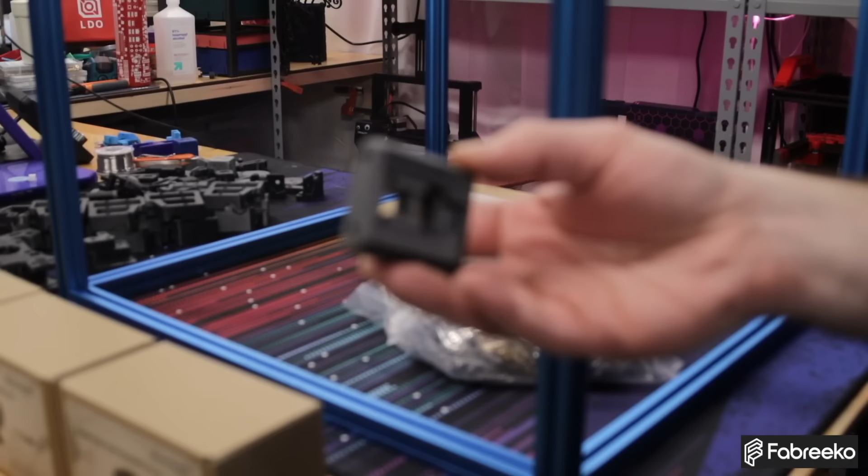It's quite nice. And this build, I've gone with a really nice, let me see if I can find the piece, a really nice set of colors. So we're doing a blue frame, and we have Polymaker. They now have Galaxy Black and Galaxy Dark Gray ABS, so these are the two colors we're using. It is a little bit unconventional, but I think it's going to look really good. So those two colors together, and that's going to be the whole entire build.

Very, very, very excited to start working on this. This is part one of however many parts it's going to take. We're going to have to build this printer as a standalone 2.4, so there's going to be some slight modifications to it. But I recommend this to you if you're building this printer: make sure you have a known working 2.4 before you start converting it. It should be extremely easy to convert this printer after the fact, and if you already have a 2.4 you'd like to convert, you might be able to do that after. So stay tuned for the series, watch me struggle through various things, and hopefully we'll have a nice working toolchanger at the end of this.

Welcome in, Maker Viking, nice to see you. Stephen Poole. Anyone else might have dipped in? What else is there to talk about?

So let me go over the projects first. That's probably a good starting point.

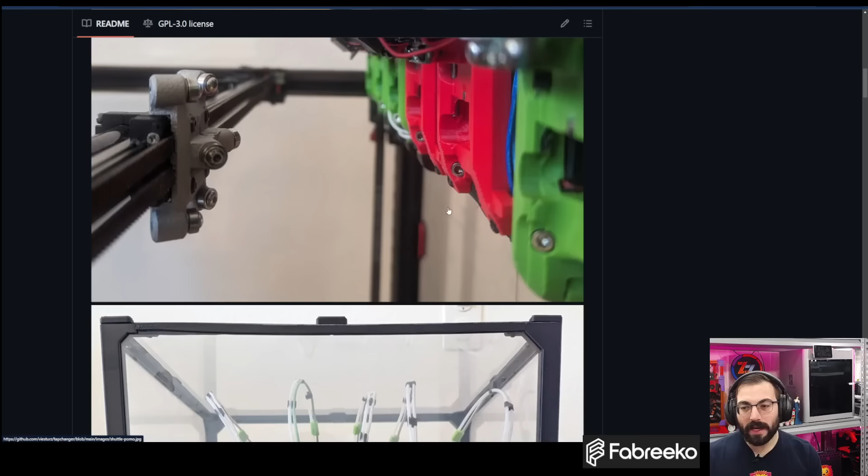So yeah, there's lots of versions of the Tapchanger. So this one right here is the Tapchanger Lite. Right now there's 3-ish versions, this is the light version. It uses bearings and rods and metal parts to ride on for the carriages. So it'll dock into one of these tools. But this right here is essentially how this system's going to work.

I'll be referencing it as Tapchanger for quite a bit of it, but do note that the actual mechanism in which the dock, whatever parts we use, that might change over time because this is still in beta and stuff might change. So this right here is a 350 2.4 with 6 dragon burner sized tool heads docked up here. So that's kind of the maximum that this will support, so this will be a 6 tool changer. It has a little, I would call this a locating probe down at the bottom, so this will align the tools. More on that later as we progress into the build.

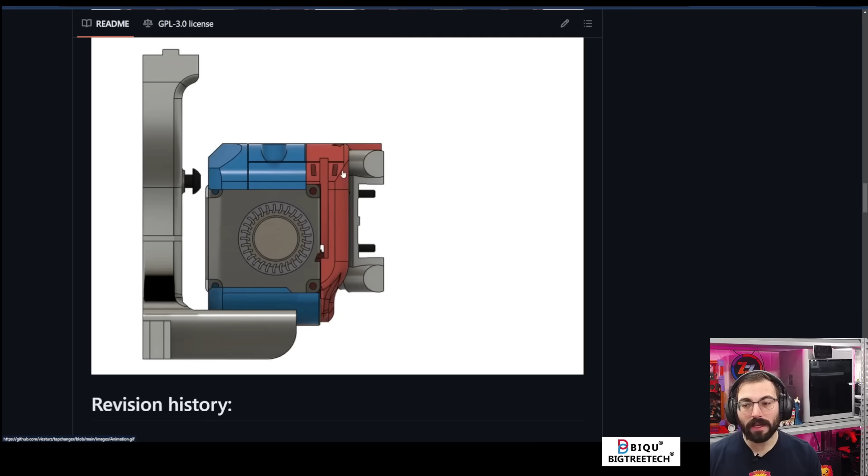You'll have your carriage, your X carriage, and that will dock into a tool and lift it up, and then it'll put it into a dock and lower. So typically on a tap type setup, it can't just pop out like that. You don't want that. So this utilizes a different design to allow the whole entire carriage to come out.

So previous versions of this included an actual linear rail version. That's what got this project going, literally taking tap and using that as a tool changer. But there are a couple of downsides with it. Even though it can be pretty rigid, people are afraid of misaligning the docking procedure, and you might lose ball bearings, etc.

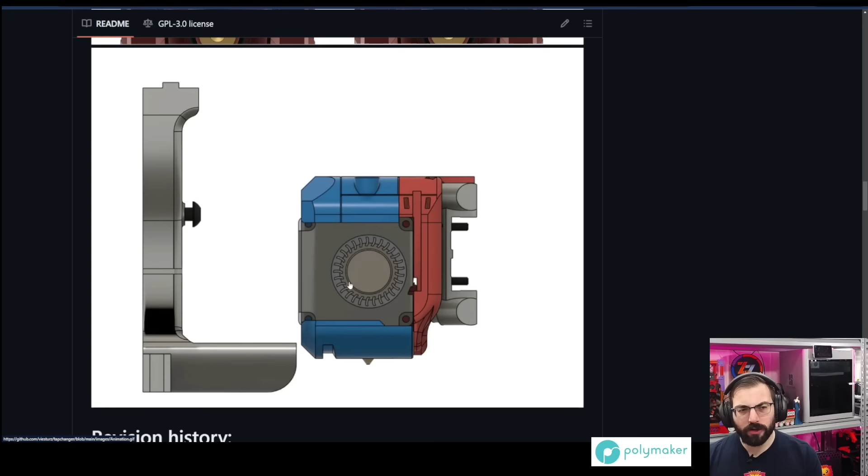So this version was invented, and this is the main version right now. But there is a new version that was just kind of released, and that is Stealthchanger. Again, this might change over time. This project seems to be evolving pretty fast, but we'll probably be using the Stealthchanger version. I have all the parts ordered for it.

So essentially, you have 2 parts right here. Okay, these are my parts. You have 2 parts right here, and I actually have them out front of me. And they will dock back and forth like that. And instead of using bearings, these use sleeves and pins or dowels. So a dowel will go into here. There's going to be 3 dowels instead of bearings or linear rail, etc.

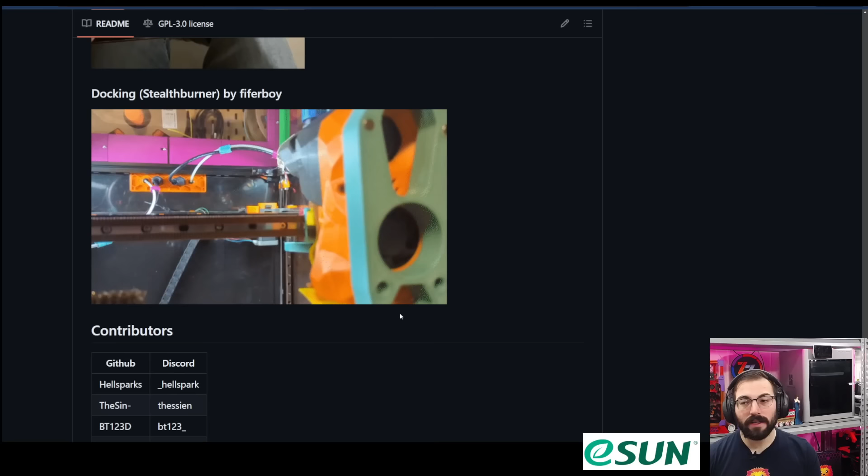And so far, this mechanism has been beta tested and allegedly successful. So here is a small video of the tool changing procedure. They're using full-size Stealth Burners, which is fine, you can do that. I would recommend a Dragon Burner for increased cooling, and it's just smaller, so you can actually fit more of them on a single printer.

So that is the current development. Note that these might change over time, and stick around for the ride.

All right, so those are the 2 different versions. We'll be building for a couple of streams, just a 2.4. So I do have a build series where I built a 2.4, the green one over there, on my channel. So if you'd like to go back and check that out, maybe get some extra context on how a 2.4 works, that will be your main source.

Otherwise, check out some of the other streamers on YouTube. Steve Builds does a lot of builds, he has a 2.4 build, Modbot as well, and of course a couple others. So there's many videos on how to build a 2.4, so don't use this as a guide to build your 2.4, but we do have a couple of special changes that we'll be making.

We are building a mostly stock LDO kit, but with a few changes. So number one, the gantry. We're going to go right to Dragon Burner because I kind of want to try out what a Dragon Burner looks like as a Stealth Burner replacement.

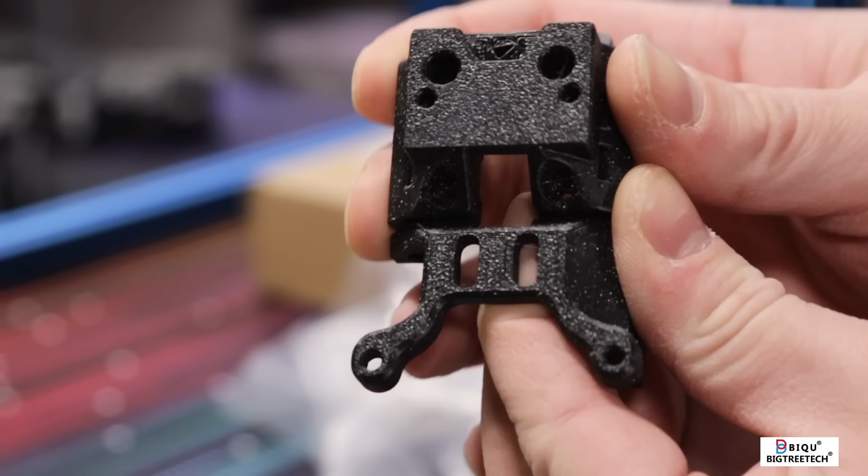And this version right here is even cooler because we're going to be using a probe. Not sure yet, we'll see what I can do. But it goes like this and like this, so we'll have the option of a probe. We can use PCB Klicky, or Beacon if we really wanted to. That's supported on here.

Anything, there's a couple of options, but for the most part it's going to be Klicky or Beacon. I'm going to see if the inductive probe fits on here. I kind of want to know, that's why I printed it to test out.

That's the dock or the mount for your Dragon Burner, and of course Dragon Burner just screws into these 4 screws. Dragon Burner 8 is the current release. So that'll be the plan, and I want to see how that works as a standalone tool head.

Be kind of cool. It's gonna look really small because this is a 350 and Dragon Burner is very small. I think I have one around here. Maybe. Yeah, down here. Dragon Burner is very, very small.

Looks like this, so it's gonna be a tiny tool head. And that goes to show, you can have 1, 2, 3, 4, 5, 6 of these lined up on the front. It's pretty narrow. But yeah, this will be cool. I'll be able to mount it. You can do this on your printer too if you want to switch over from Stealth Burner to Dragon Burner.

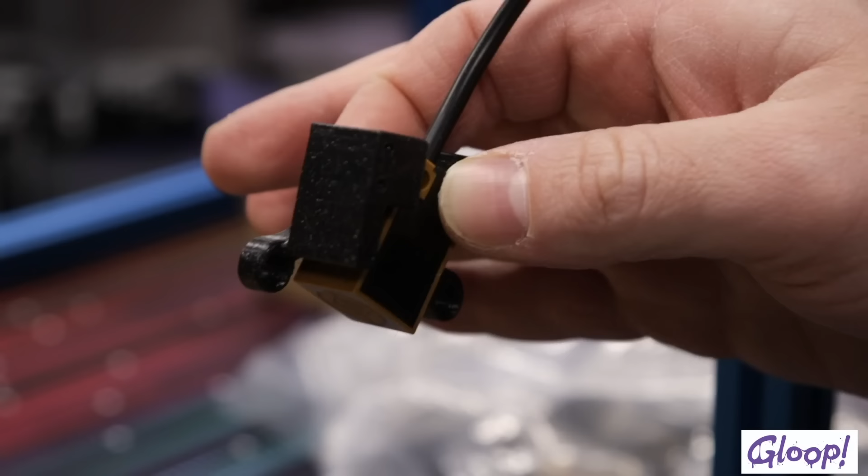I'm gonna see if this will physically mount, and it looks like it will. Yep, so we will be able to use the inductive probe per the stock build. That'll be fun, that'll mount on the bottom of this right here. This is the probe adapter for Dragon Burner. So it has the 2 screws, and I'll be able to align that perfectly wherever it needs to go.

Very similar to how you install a probe on a stealth burner. So that's cool. And I've never actually used one of those probes, so I'll finally get to experience it. And I'm not going to be enclosing it, I'm not going to be printing ABS before I test out Tapchanger, probably. So it'll be fine for us for now.

Alright, that's really enough procrastinating. So, to get going, we are going to start building a 2.4. So we're going to be following the main build guide for most of this. Now, I do have a couple of basic mods.

My front idlers, the beefy front idlers, I gave you a sneak peek of that right here. So instead of the stock Voron idlers, we'll be using these. There's almost no reason to use the stock idlers because these ones are so much easier to service, so much easier to run belts when you're initially building it. And it's going to have better adjustments, better tensioning.

So I would recommend getting these. I'm actually using a version that takes an M5 screw instead of the pin, so we'll see how that works out.

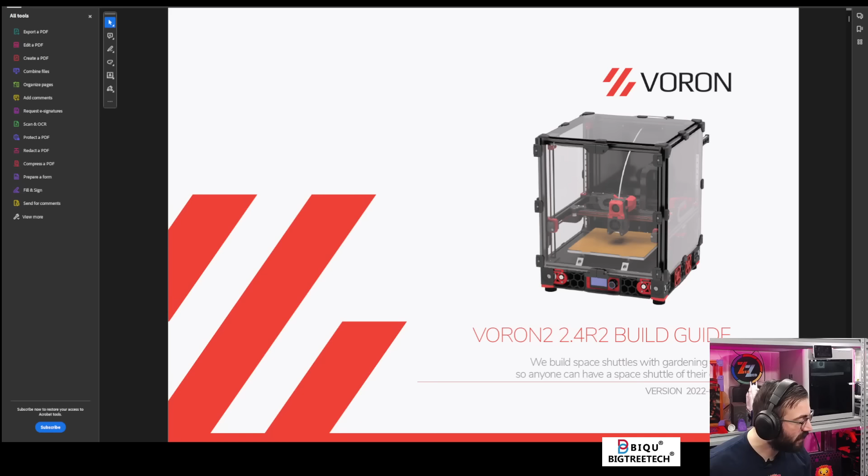We're also going to be using the beefy Z idlers because it's 4. So we have these guys right here, just little beefy Z idlers. Guess we'll figure it out. Might have all the parts for it. Not 100% sure, I think it's the same or a similar situation where it kind of just goes up and down and is, quote, beefy. Maybe, we'll see. We're not going to be doing that today.

What else? So Dragon Burner right away. Oh, electronics, I haven't decided what we're going to use for a board yet. I might go with a Manta board. I have a Manta M8P version 2, which does support CAN directly without any other modifications. So I don't need any adapters, and I've already configured a bunch of those, and it's really easy. So I might just go with that.

We're going to be using 6 CAN toolheads by the end of this. Our initial setup will actually use an EBB 36 toolhead for testing, so like a single CAN toolhead, and then we're going to go and just add 5 more toolheads. No big deal.

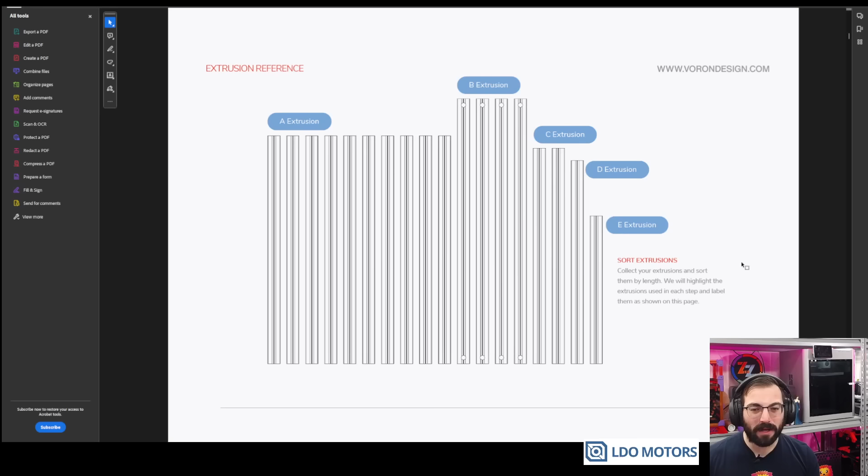All right, so to start off the build, we need to build the frame. Hey, I have already built the frame. Did that off stream because that's one of the things where you don't really get anything by watching me. So yeah, I built it and I squared it up.

So I got to this point, and now we have to install the bed rails. So let's do that. I gotta find my little corner brackets, they should be around here somewhere. I've seen them, so those.

Thinking this is gonna take a long time. It's a 2.4 build, and spoiler alert, I will be working on this off stream a little bit. All of the non-critical stuff, like the regular 2.4 assembly, I'll be doing as much as possible off stream. I wanted to wait though to start fresh and explain as I go.

So that's why I haven't started yet. And I had a couple of other projects. I just finished up a V0, you can see that behind the screen, so that's printing very fantastic right now. And then I also have a Micron Plus beta kit that I've been putting together for West 3D, and that is almost completed.

Oh wow, let's see if I'm actually gonna be able to find these. Might be in one of these bins down here.

So anyone who's watching live, what do you guys think of Toolchangers in general? Prusa is the first, as far as I'm aware, the first company to bring a Toolchanger to kind of the hobby level. E3D had a Toolchanger, but it was more of a motion system, and you had to be kind of an expert in order to configure it and determine what you're going to use. So that was a pretty cool concept, but a lot of people didn't get one because of all the work you'd have to do to set it up.

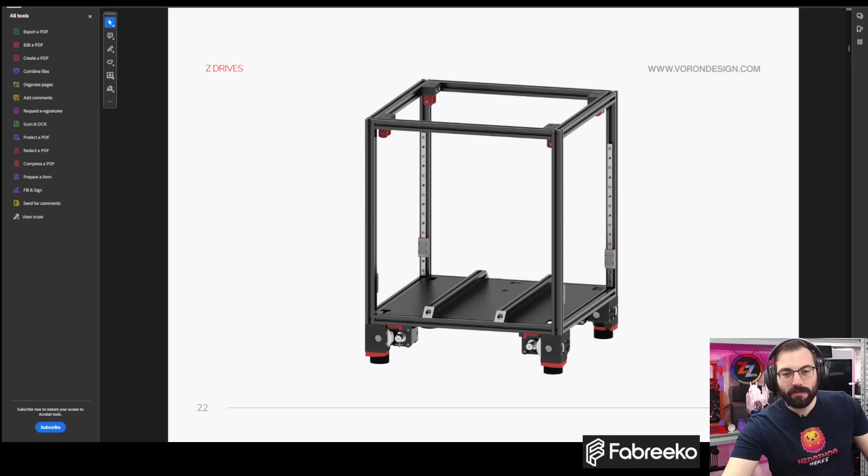Alright, well, let's skip this part and pretend that we have this bottom panel on. Let's go to here. So we're gonna be installing these right here. So this is the Z drive. If you're unaware how a 2.4 works, it is a belted Z, one on each corner. And this is a gear reduction. So you have your motor mounted here, and then there's a whole gear reduction mechanism that takes place.

So this is a listing of each drive. If you're trying to locate your drives, your front left drive is Z0, and it goes clockwise. So Z0, Z1, Z2, Z3. And then a typical build will have these Z idlers, but we have the beefy Z idlers instead of those.

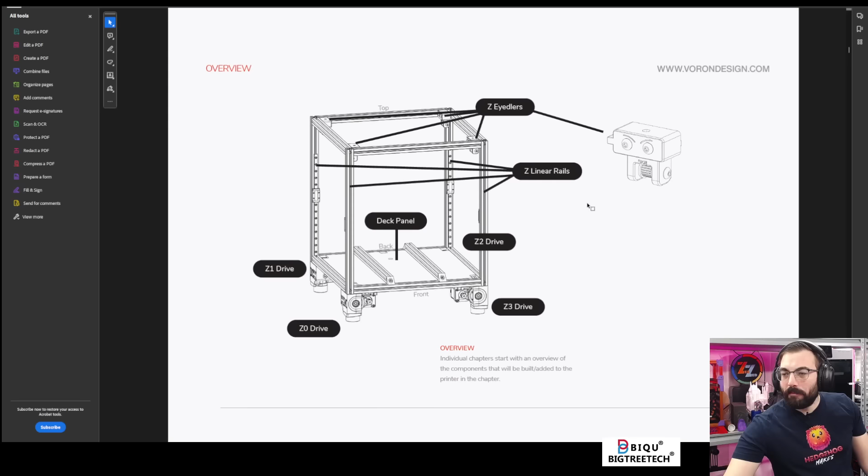Oh, linear rails, that's right. It wants us to go straight into linear rails. Do you guys want to do linear rails, or do you want to start working on the Z? Oh, did I print off the alignment tools for that? I'm actually not sure, I don't think I did. Yeah, let me print off those real quick. So yeah, that's gonna be our option, is waiting for me to print things. Good start to a build.

This first one is really just kind of an introduction to the Toolchanger, and then answering any questions you guys might have watching this live. So let me go in and preheat the 2.4. Sorry, not the 2.4. The Voron, god, Trident. Preheat the Trident, and then load up the files I need.

So let's talk about the Prusa XL for a little bit. The reason why I am very excited about this project is because, number one, if all goes well, if this is built to specification, I'll have 6 tools. The Prusa XL has 5 tools. And while that might seem like a lot...

Because I wanted an XL. I wanted that Toolchanger, but Prusa, at least at this time, is still kind of beta testing them and hasn't fully released it after over 2 years of development. So your mileage may vary.

Yeah, I'm going to totally find these parts that I need after the stream. It always happens, it always happens.

So these are the Z idlers—or not Z idlers, the Z... what do you call these? I call them belt drive assembly gear reduction thingies. It takes the motor and does a gear reduction on it, that's all, because you want the extra torque to drive the gantry up and down, plus extra precision over the stock motor. So that's one of the main benefits of the 2.4—you get extra precision on the Z-axis.

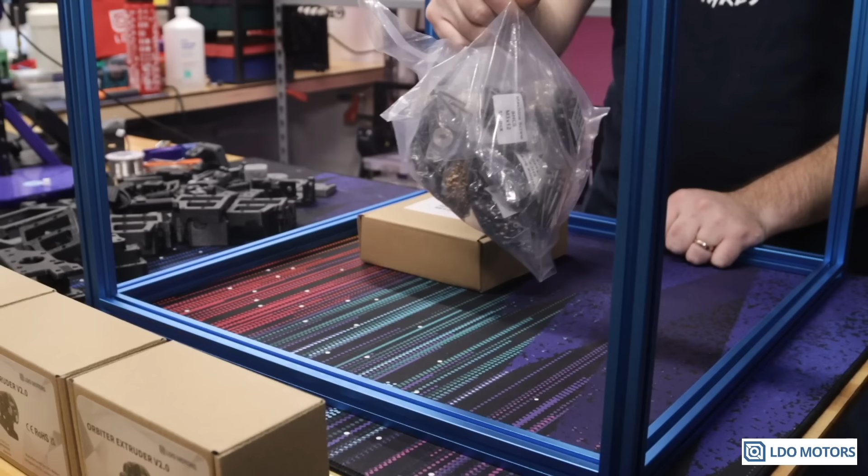So we need a lot of heat sets. Let me bust into the kit and see what we have. So this is an LDO kit, and they provide this—this is an obscene amount of parts. Like an absolutely crazy amount of parts. And this is kind of what it takes to build one of these printers.

You might think, wow, there's no way it can use all of these fasteners. And no, you actually don't use all of these. They give you a lot extra, which is really nice because if you're building something like this, the last thing you want is to run out of parts. So LDO makes sure you're not going to run out—they include extras.

So yes, one of the benefits of building a Toolchanger is that you can use support filament. One of the cheapest ways of doing supports, as mentioned in chat, is you can use PLA and PETG interchangeably as support filaments for each other.

And no, we're not giving away orbiters—I need all of these for this printer. That's why they're kind of lined up. We're actually using the stealth press to heat it up, I guess, to assemble all of these parts.

So yes, I do plan on at least trying PETG with PLA, and all the things—I'll be able to use carbon fiber nylon. I have some Polymaker support filament specifically for nylon, I'll be able to try that out and optimize all of it. I'm excited to see lots of different things you can do.

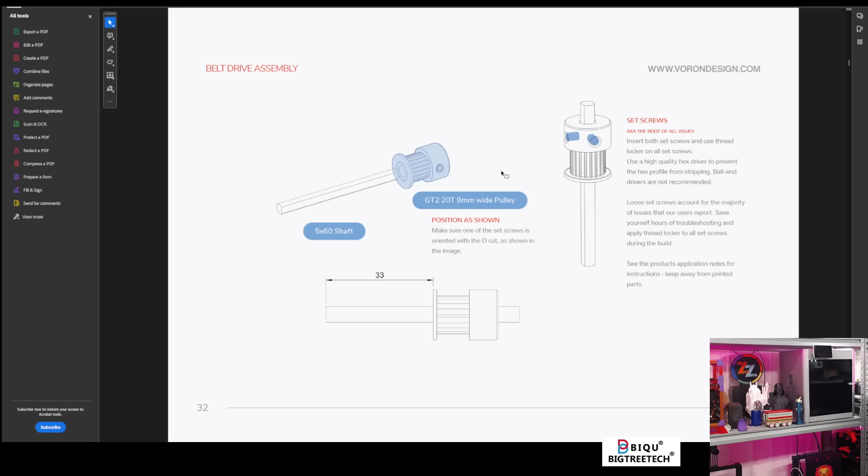So I have some foam tape, I'm going to put that back in the box. So I need pulleys, I think I need, okay, these are 20-tooth pulleys. Okay, so I have 4 20-tooth pulleys in a bag. Oh, these are also 9mm pulleys, these are wide ones. And then I need shafts, those are here as well. I'll start with that.

And then I will angle my camera so you can kind of see what I'm doing. Maybe. All right, cool.

Voron Toolchanger, yes. So TLDR, this is going to use the tap style of mechanism with a dock mounted on the frame of the 2.4, and using the 2.4's ability to move the gantry up and down, we'll be able to dock the tools at the top. This will not work on a trident style, so a fixed gantry. You need a different style of mechanism for that, unfortunately.

So these are our pins, and these are the pulleys. And I do believe we have a special treat from the LDO kit, so let me find that. Let me see.

Cool, looks like the part on the trident is done. Usually when I'm doing something like this on stream, or if I'm just building a printer, I'll keep one of my printers preheated for ABS, so I can just send a print to it.

Oh, what am I doing? Should be over in... shoot, where would it be? LDO includes a separate set with grub screws, and I gotta find those. Is it in the fastener kit? Where are those located? Does anyone remember off the top of their head where grub screws are located? I'm guessing it's in the fasteners, but I'm not 100% sure. It's kind of a small bag with little grub screws.

So this one looks kind of like that. What I do is I put the grub screw on the end of a screwdriver, and then I just kind of coat one side very lightly. It doesn't take much, and that's worked out. So do not forget that. You might run into issues long term.

So these were located in the fasteners, which it's technically a fastener. There we go. So this wants us to... first thing I'm going to do is install all of the grub screws into these pulleys. I think these take an M2, 2mm.

Yes, and make sure to get blue Loctite for these builds. There might be some other colors you can use, but I think red is definitely on the avoid list. Anything that's considered permanent is on the avoid list, because one of these days you will have to take this apart. So I'm just going to preset these grub screws just enough so they're flush, and I can kind of feel that the Loctite is giving a bit of resistance, which is good. That's exactly what you want. So I kind of just stick it on the tip of my driver and then screw it in.

So get these all done in batches. Candy. Yes, coated. These are coated grub screws. Even more delicious. Don't eat these, please.

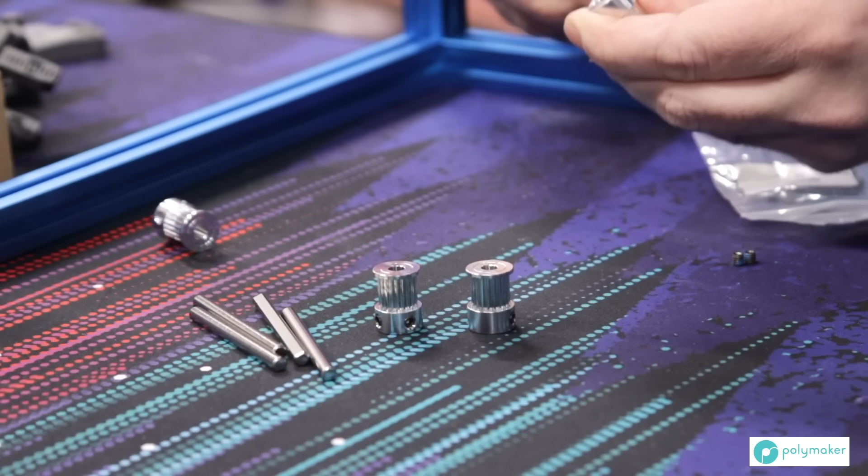All right, almost done with these. The 2.4 gets a little bit repetitive, I'll say, because you have to do everything 4 times. Starts to become a little bit repetitive. It's not too bad though. Once you get into the swing of things, your build will be done. But it's been a while since I built a 2.4. The Micron is sort of a 2.4, but it's just miniaturized, and things are slightly different. Ever so slightly different.

Alright, so put these grub screws back. We'll need them for other parts momentarily.

I actually quite like working on this desk pad. This is an LTT desk pad, but you can use really any desk pad. It's nice because fasteners won't roll away, they kind of just stay on the surface. And it's a really nice, comfortable surface to work on, so I like it.

So that's these 4. Again, we're gonna do stuff in steps. Now we need to insert this onto the shaft. So this shaft has a smooth side to it, very similar to your motor shaft too. It looks like a D. You want to make sure one of the grub screws lines up with the smooth side on the shaft perfectly, so screw it in on the smooth side first. That makes sure you have good contact and that this isn't going anywhere. I'm just going to give it a slightly snug fit just to get it on.

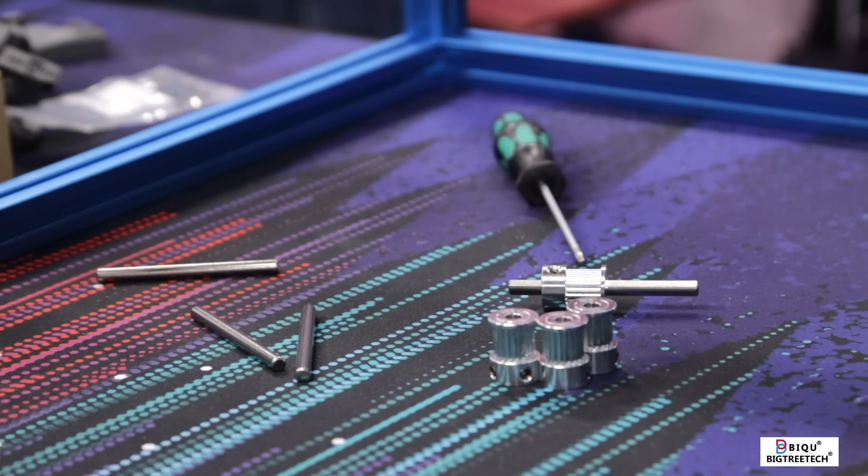And then we have to measure. I think this is an approximation, it doesn't have to be perfect, but it should be very close. So, 33 millimeters. I'm just going to use a ruler because I think more people are likely to have rulers.

So when you're building a Voron, make sure you're using your Voron design ruler. Oh, I love these things. If you ever go to a show and you can get one, Voron is sponsoring the Rocky Mountain RepRap Festival, so make sure to see if they have any. If they don't, then oh well.

So let's get this close enough. I'm just going to look at it over here. So 30, 31, 32, 33. If you have calipers, those will work better, I encourage using calipers. I don't know if one of the tools acts as a guide for this either, usually there's like a pulley guide.

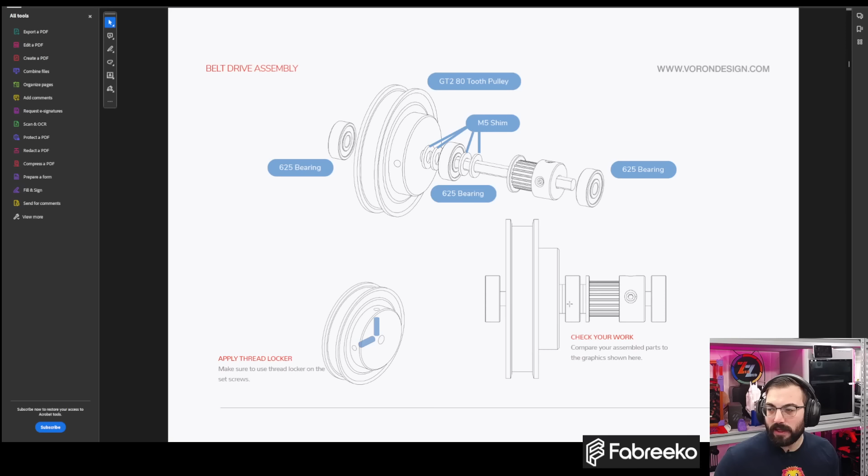Alternatively, let's check one thing out. This uses little bearings, let me see if this is correct. So looking at the diagram right here, this is our assembly. We'll have a bearing, this giant 80-tooth pulley, M5 shims, a 625 bearing, 2 more shims, then the pulley, and then another bearing. I think these 2 on the sides don't touch, but the middle one does, so you want that to be correct. As long as you're within an approximate distance for this, you should be fine.

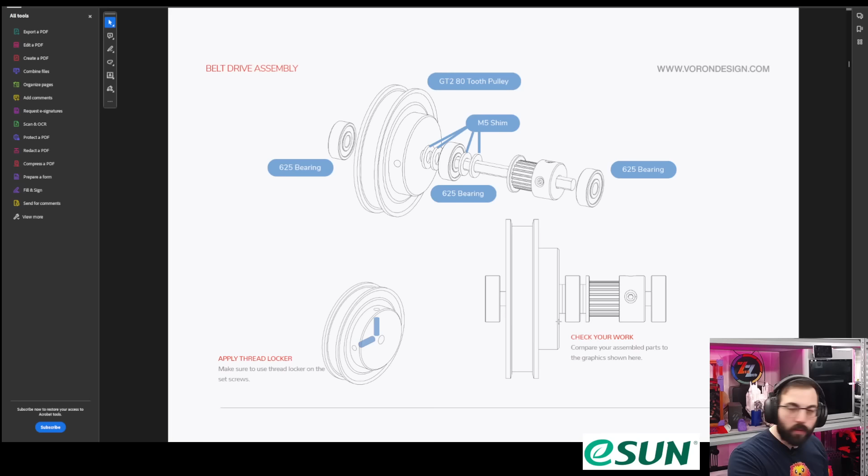So we will need to add a couple more grub screws for the 80-tooth pulley, I think. Let's double check. So the LDO kit provides these absolutely gorgeous pulleys, I love these so much. They don't come with grub screws, we'll have to install them. They should just be the same ones right here.

And these are visible when you're done the build, which is fun. I do have these in my original 2.4, and they're nice. So the grub screw will screw way, way deep in there, you'll have to really screw. So what I like to do is just watch that center, look at it until the grub screw starts poking out, and then back it off. Here you can see the grub screw starting to stick through, that's too much. Back it off until you can see straight through the hole without any obstruction, so that way we can slide this on and get them tightened up.

So do not forget these grub screws. In fact, let's just do them all because why not? Let's bring it to the front and do them.

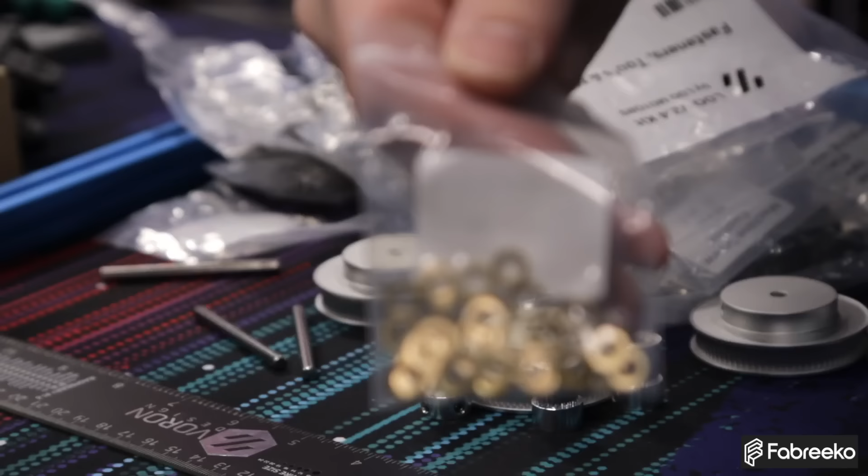Aha, here we go, so these are our precision shims. So these will be used as spacers for a lot of our different sections.

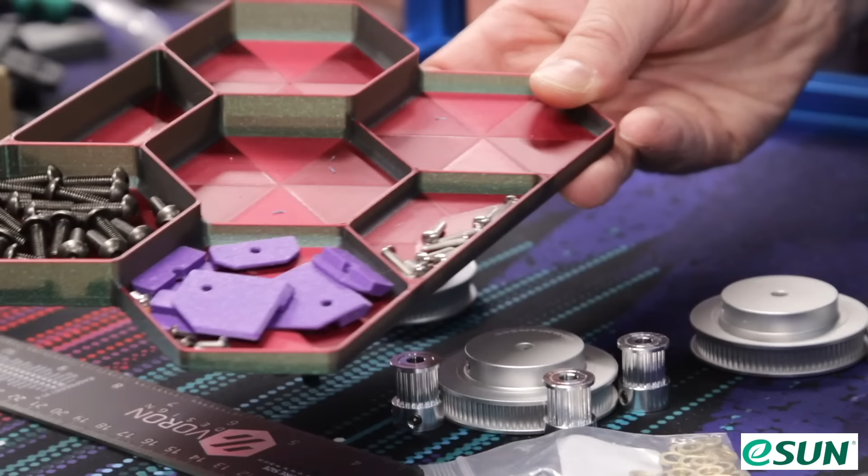It's all back. I usually do this - I'll put everything in, and as I start a build, I'll dump out a bunch of parts. I think I actually did that already. Didn't I already print off a hex tray for this? Now that I'm thinking about it, one that has Christmas colors. Oh yeah, I did, I totally did. Nice, I printed this out and started using it for other projects, but these were the fasteners that I used. So let me just put this aside, and I can start using this. I got one random section of misfit fasteners.

So these shims, I can just put them on the table and only take out as many as I need. I'm comfortable not losing them since I'm building inside the frame, so I'm not just going to dump them everywhere. Let's take a bunch out for now and put them back when I'm done. It's nice to keep them in the bag because they're organized.

So going back to this step, we have this right here, and then we have 2 shims, 1, 2. We'll have a bearing - these are the 625 bearings. Those slide on. Then I'll need 2 more shims, 1, 2. I'm looking at the guide right now on the manual, I'll show that right after the fact.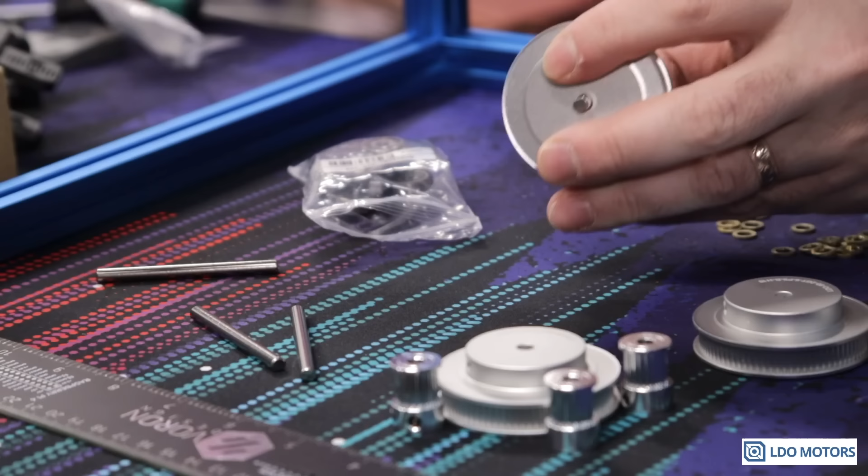And then we have our big 80 tooth pulley. Just as before, we're going to line this up with one of the grub screws. Doesn't matter how you install it, just make sure the flat shaft has a grub screw lined up with it - line it up with this one right here if you need to. This is when you take this thing and press it together, hold it snug as you screw this in. You could even hold it like this if you wanted to, but just hold it in place so that this makes contact - that's important to keep everything firm.

So before I forget, I'm going to screw in the other grub screw as well. This is a great check - I don't think I screwed this one in. Yeah, I didn't. Great check to get all 4 grub screws screwed in. You do not want these loose. You don't want them excessively tight, but you don't want them super loose. Very, very important note.

Do not use a ball end driver, which looks like this, to tighten grub screws. You have a chance of stripping them, and if you strip a grub screw, you're going to have a very bad day because you'll never be able to get it out. You have been warned.

So just by visual inspection, it looks like we have more shaft on this side than this side. So if I wanted to, I can actually move this whole assembly over to kind of center it, and I think I'm going to. I'll use this one as a reference when I build the others on where to put it. This is kind of eyeballing it, but it'll be good enough for our purposes. So I'm going to move this over a little - just have this screwed in pretty well, unless you want to slide.

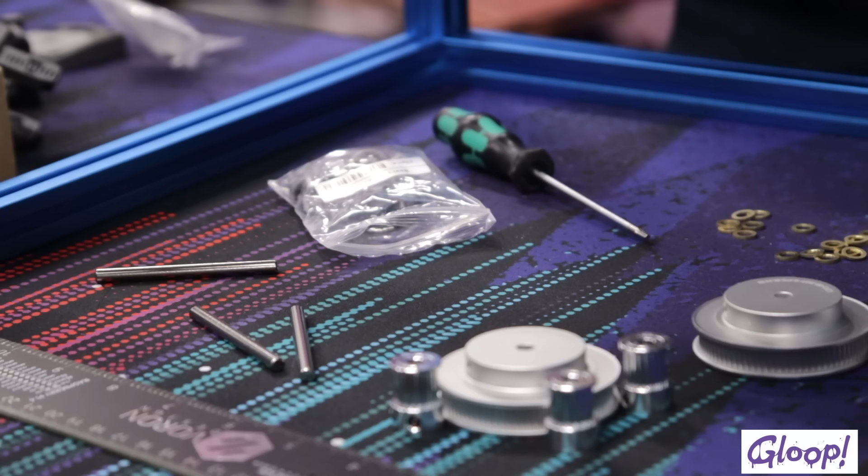Okay, interesting. Why is it so tight? Anyway, I'm just going to slide it over a little bit to get it perfectly centered. If I measured out properly the first time, I wouldn't have that issue. But this goes to show that you don't have to get it perfect, you just have to get it close enough. So I'm going to loosen up this one and press it up against there and double check - we can test it on the actual part after to see if it'll work fine. So get all 4 grub screws tightened, and that actually looks a little better. Probably could tune up the distance, but it doesn't matter.

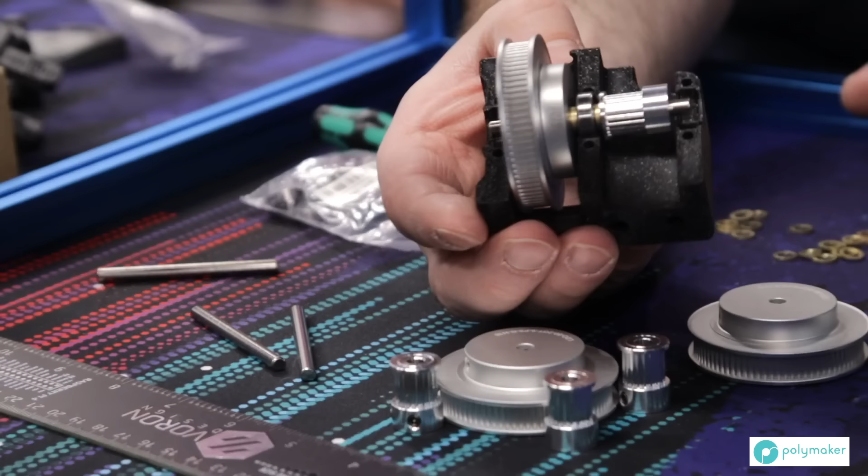So to test this, you're going to want to take one of your parts like this and drop it in - just like that. So that sits right in the middle, and it'll actually spin perfect. Now is a really good time to test and see if it all looks straight, with no weird wobbling, etc. This should be super straight and smooth running with the one idler, okay? As you see, there's plenty of space on both ends if this isn't lined up exactly correct - that's fine, perfectly fine.

So we're going to actually build all of these at once, get them out of the way, because we know we built them correctly. Let's just get them all built, okay? So I'll put that one aside, and actually we're going to use one of these as a reference to build our others. So we're going to grab our pulley, slide this in, and then look at this one and line it up so it's kind of matching. Say, all right, that looks about right, and then screw it in. It doesn't have to be perfect because there's no alignment - you just want the whole thing to be roughly centered on the shaft.

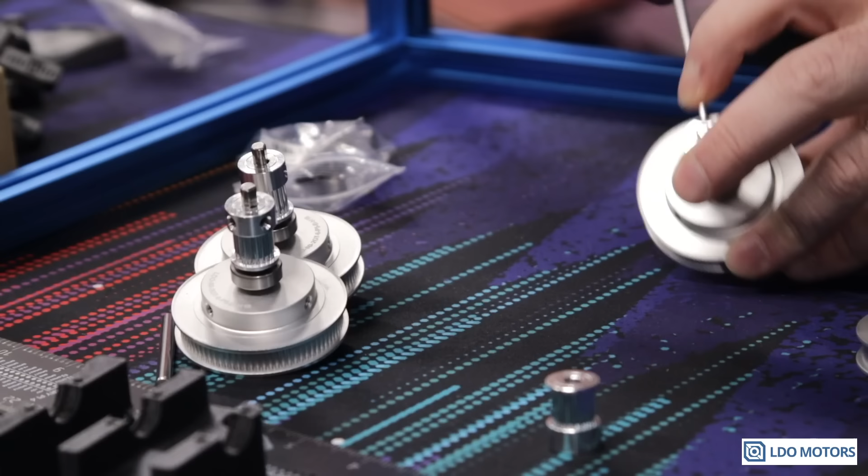But I do love the experience building an LDO kit. I do want to try out some other brands in the future. Specifically, I want to test out a kit that comes with pre-printed parts. I think that could be fun. One of the challenges of building a printer like this is having to print all the parts. And if you buy them, well, they get a little expensive because it's not fun to print parts. At least in the sense of, you know, oh, just send a print job to the printer. You have to keep them organized, you have to make sure all the colors are correct, etc. And then most importantly, you have to make sure they're printed well.

I did use a combination of my Trident and the Bambu to print these parts, so they are at Print It Forward standards, I would say. And that is good enough for this build. You want to make sure that all the tolerances are good, everything snaps together perfectly. You want to really make sure that everything is printed well enough to be able to build this printer.

One of my favorite parts to test print is these guys right here. So these will snap together if it all goes well, and they'll line up perfect. You want to make sure there's no warping, that there's no gaps anywhere. So you can take these and really kind of test the fitment of. These are the AB motor mounts. So make sure that that all lines up perfectly, there's no warping, etc. And once you can print these, then go ahead and print the rest of your parts. So for some reason, I always start with that.

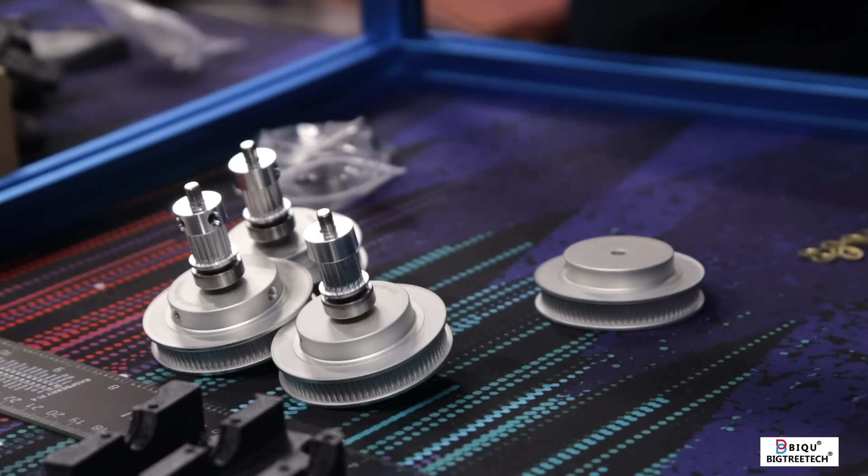All right. See if I'll make an error with any of these. Hopefully not.

So this will be my second official LDO kit. I built a couple of other printers that have used a lot of LDO parts, including their pretty fantastic bag of components, a fastener kit. So I really like the fastener kit. I built the V0, that is an LDO frame and fastener kit. The original 2.4 I built was a LDO frame and fastener kit as well, although I did self-source a lot of the components via West 3D.

All right, cool. Those are all assembled. I'm going to put these shims away because we don't need them.

Put them away. All right, so we're just going to double check that each one of these runs smoothly on one of these printed parts. So again, we're going to take this, spin it, and make sure that there is pretty much, you know, as smooth as possible motion.

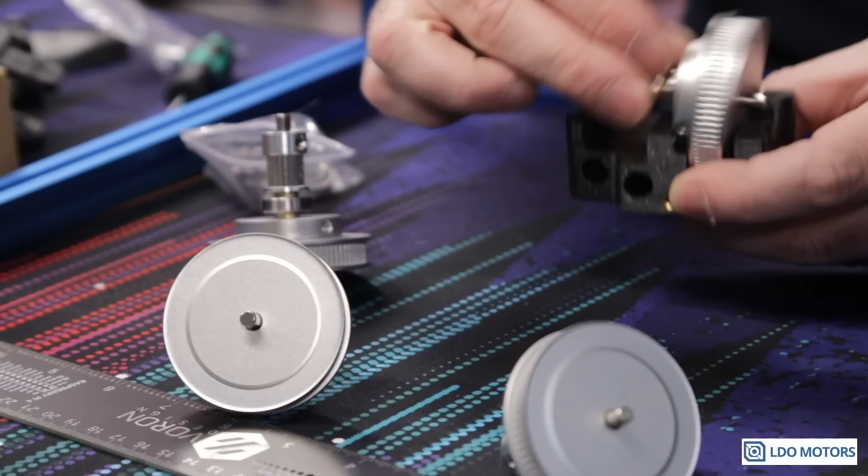It all looks straight, so that one looks good. It's going to quickly do all of them. Looks good to me. Looks good. Last one. Perfect. Sweet.

Yeah, I love this Voron ruler. It's a good one. Actually, I have a red one too. These are nice. Pick one up if you can.

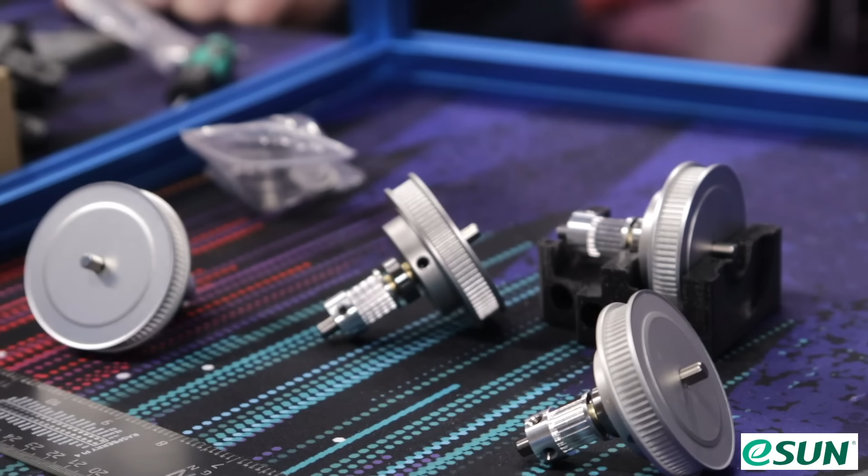So we just built the main body for the belt drive assembly. Now it does have two additional bearings that go on each side, but we'll install those as we put these together. So we're almost about to do that. So the first thing we need to do is find our belts. So these are little closed loop belts that will be used to act as the belt drive for the gear reduction. So we need to find those.

It'll be in one of the boxes. LDO kits come with a ton of boxes, so familiarize yourself with what's in each box before starting your build. That's my number one tip. Go through every single box, poke around, just so you can familiarize yourself with what's in each box. So this one is probably going to be with the belt. So I see a belt here. Let's see. Yeah, we have a little bag with our closed loop belts.

Looks like this. These are pretty standard for 2.4 build. You should be able to find these pretty much anywhere now because of that.

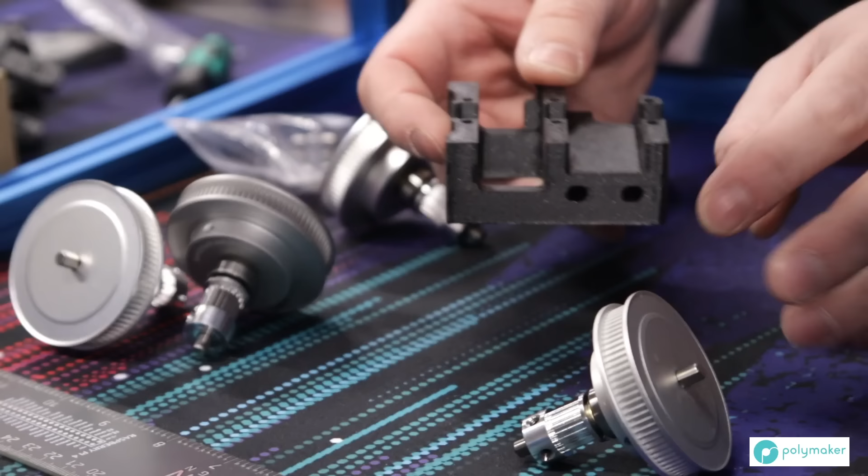So what we're going to do is grab one of these. In fact, before you start, find any of these parts, grab one, and then find its matching pair. You'll tell if it's matching because it'll line up correctly. This one does not match.

This one does match. Okay, easy as that. So find a matching pair, and then put those aside. Grab one of your pulleys, grab a couple bearings, put the bearings on to here. The reason why I didn't do it right away is because they might fall off as you mess around with it. So put both of the bearings on here. Grab your belt, put that on there too.

The belt is going to stick through the smaller part, so start with the thinner of the two parts. Stick your belt through, and then this is where you have to align everything. Right now, with everything pressed together, it does not work. So you'll have to line up the center bearing, get that in place, and then move each of the two outer bearings out until they slot into place. There should be a gap between the bearing and each of these parts. That is normal.

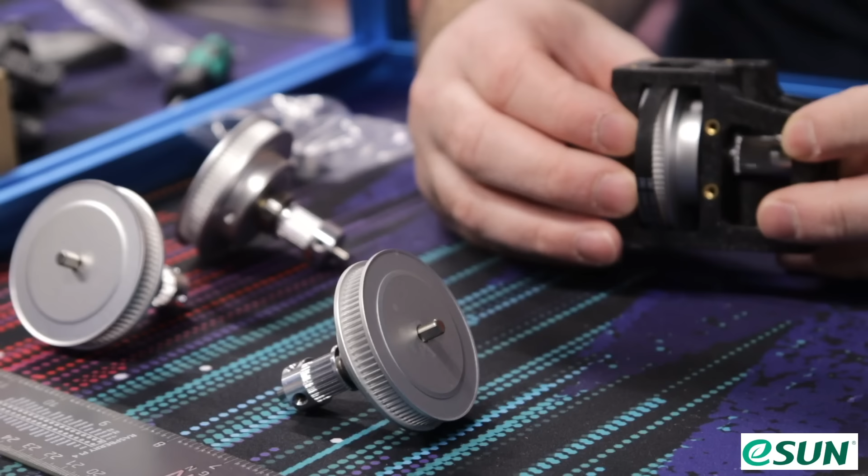So that belt goes in here. We're going to just do a sanity check and make sure everything runs smooth. And it does. So the belt will stick over on the smaller side, and then we can just slot on our big part right over it. Don't forget the belt, because if you screw this together with 6 screws, you'll have to undo all of them to access the belt. So right now the belt is trapped, which is expected.

At this point, you want to make sure that your shaft is not sticking out excessively. You want it to be kind of flush with each of these bearings too. If you find that on one side you're very far in, you can change that. So this will be fine. It is functional. Also make sure that your parts mesh together very well.

You don't want to see any gap. So that should be fine here. They go together well. If these parts are warped, I would strongly consider reprinting them, at least these ones, because they're functional parts. It's more important to have non-warped parts for these types of things. If you have to use a brim, you can use a brim. Just make sure it's cleaned up very well.

So we need M3x40 fasteners. Once again, I'm going to dig through this baggie. One thing you might want to do is grab an empty filament box. Here, we'll do a tip. I'm going to grab a spool box right here, and dump this whole entire bag of parts into this spool box. I like to keep these boxes because they're pretty useful for random things. So now everything is in this box, and I can look through them easier.

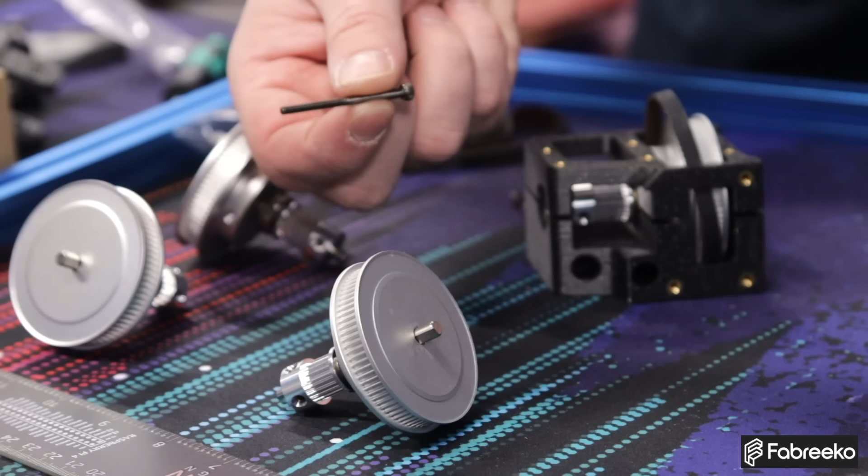So let's grab a bunch of these. We're gonna need 6 per. Oh, these are interesting. These actually are not full screws. Interesting. Is that correct? I don't know if I've ever seen that. But instead of a full screw, part of it is flat. Huh. I can't say that I've ever seen that, nor do I know if it's actually necessary.

I'm pretty sure that's the only screws that they have. Are they all like that? Yeah, some of them are. Interesting, I don't know if they've revised their parts, but I've never really seen that. Yeah, interesting, their M3x30s are like that too. Cool.

Neat. So grab 6 of those, whatever they are, and then stick them through right here. Oh, that's cool. Because one side is a little bit thicker, you can kind of put that in like that, and you have to press it in. So it's a very tight fit. That's nice, actually. That means that it's going to be perfectly straight.

Need to order titanium hardware. I will stick with this. So those are all in there. I'm gonna grab a larger driver, then screw them in. So make sure that everything is aligned correctly, that everything looks correct, and then start screwing them in.

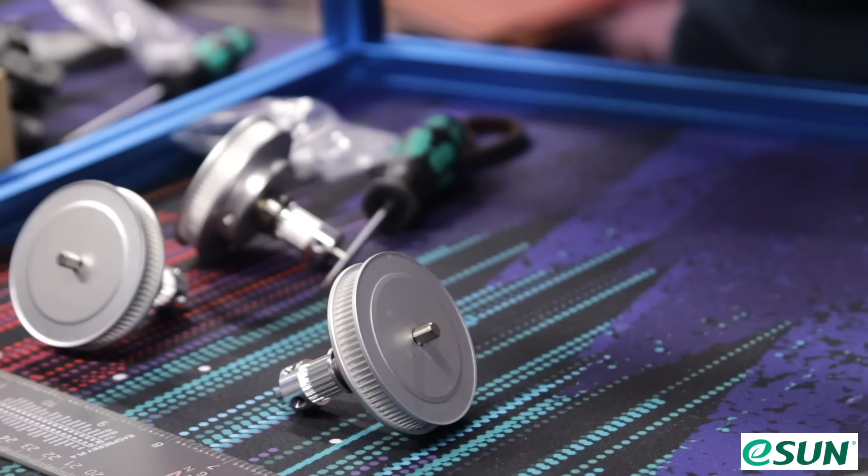Awesome, then repeat that four times. Can't see, well, it'll run smooth. Just note that it runs smooth.

Alright, so let's put in this right here. Grab some more bearings. You can actually zoom out a little bit, that'll be easier.

Yeah, I did a blue frame. It was like either blue or black, or well, blue, black, gray. Really any build, any color besides black.

Pick any color, as long as it's not black. You know, if you're building a fun build, come on, just build a... get a fun color frame. You're gonna look at this thing every day, might as well be an art piece as much as a functional piece, right?

I've never used a black LDO frame. That's funny, huh? Black frames, yes, I've purchased many Zyltech extrusions and I've actually cut them down to size for a couple builds, but I've never gotten a black LDO frame that I can think of.

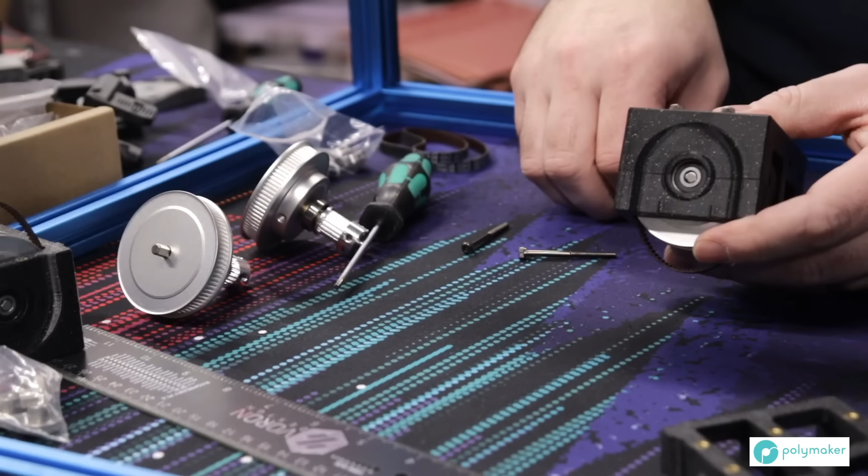Right, get these screwed in.

Now, I've had a lot of comments, like, why aren't you using an electric driver? Why using a hand driver? A lot of these screws, it's only a couple turns to get it tightened, like do I really need to pull an electric driver for this? Just a couple screws. And I like to hand feel, you know, say, that feels kind of like the right tension. The right tension is kind of when you're screwing it in, and with a light grip on the driver, you start to slip.

Right, your grip starts to slip without the driver moving. That's how you know, like that, that's about the right tension. Just like a loose grip, and the driver starts to rotate, or your hand starts to rotate and the driver stays still. You'll get the hang of it, but it's very important not to over tighten these, because you'll start to induce extra stress on the plastic, but you also don't want them loose. So there is an appropriate amount of tension that you want to tighten these to.

Torque spec. Is it worth using a torque wrench for all these? No, not at all. They are designed so that you can have a little bit of play.

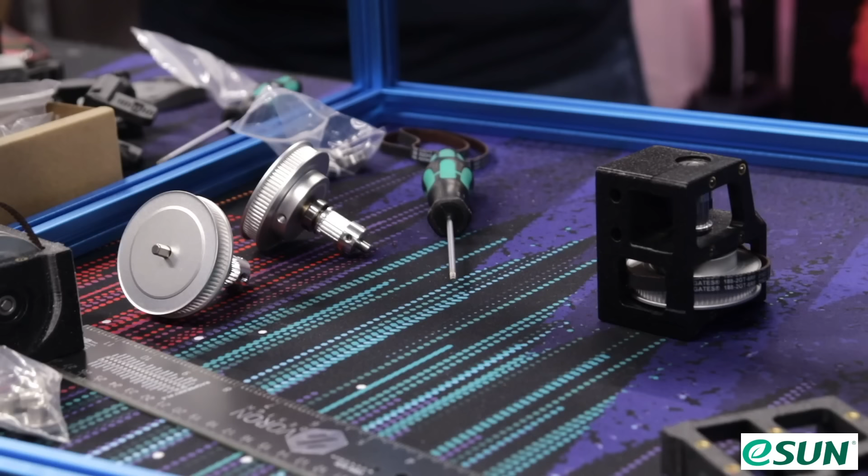You go right before the screw gets loose. Then use Loctite to fix your errors, right? You tighten it until you hear a crack, and then you back it off a half turn. That's typically correct. I'm joking. Don't do that, don't do it.

So we're going to make sure this goes smooth. And yeah, just imagine that it's smooth. Two more times, that's it. Two more times.

You have exactly as many bearings as we need. Great, clean up as you go, throw away all the trash as you work.

Had a bearing fall out, it's alright, let's put it back on. Let's see. Nope, that part, right here. There we go.

So these are actually mirrored. We'll have two of the same style, one on each opposing corner.

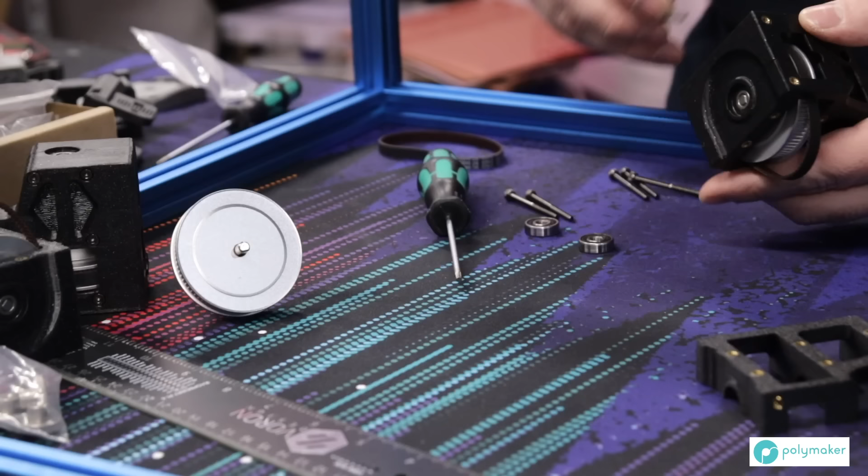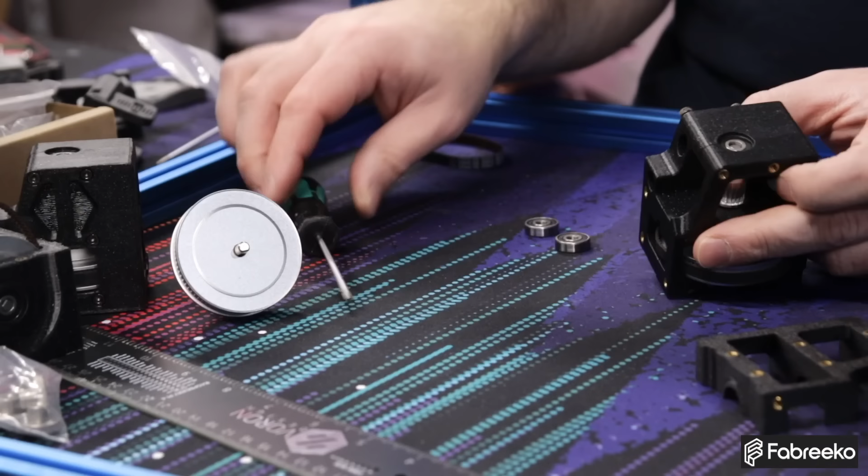So the question is: is belt drive any better than lead screws? This has been heavily debated in the Voron community because you have your 2.4 and Trident. We have some pretty big fans of the Trident, and pretty big fans of 2.4. I like them both, I actually lean a little bit towards the 2.4 for a couple reasons, but nothing due to print quality, they both can print just about the same. If you're trying to get the best possible print quality, you might not get a crazy amount extra by going for a 2.4. Belted Z has its benefits, but a proper lead screw Z is also fine. So there's pros and cons to both designs, 2.4 and Trident.

But there is a benefit of going with a 2.4, and that's the fact that we have a belted Z. With lead screws, we're actually limited on how fast we can move the Z-axis up and down. There's a lot of friction on a lead screw, and if you go too fast you get quite a bit of friction. So the upper end movement speed of a lead screw is around, give or take, 25 millimeters a second. With belted Z, well, there really is no limit. So if I can physically spin my drive motor fast enough so the output speed is 200 millimeters a second, I can move my Z-axis at 200 millimeters a second.

With this configuration, I'm guessing we'll get around 150. So why is that useful? Why do you want a fast Z speed? Well, this is a tool changer, and the tools are mounted at the top, which means all our travel moves are going to be on the Z-axis to change tools. So the faster our Z-axis is, the faster we can change tools.

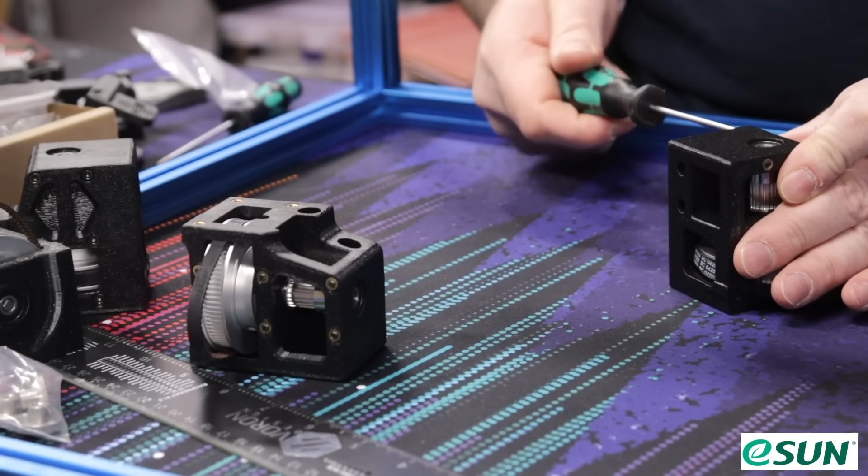But for the sake of this build, I want others to be able to follow along. So if you're just using your own 2.4 kit with reasonably stock motors, then yeah, there's not going to be much difference. I want to represent this build as what I think most people are going to do, which is buying something like an LDO kit or another kit and using the stock motors.

Get the Kraken board and you can do 48 volts on all of them. Yeah, that's possible. Maybe we can convince Big Tree Tech to send over one of their overpower boards and play around with that. But I will say, once this gets going, we're not going to change out or tinker with it. It's going to just work. We are not tinkering with this machine.

Calibration is not going to be... it'll be reasonably easy, I say that, but once it's calibrated, I'm not going to want to change it. That's kind of like having a stock 2.4 with the inductive probe and the nozzle end stop, and then changing out your PEI sheet -- every time you change it out, you have to redo your Z offset. I don't want to have to ever go through that.

So we're going to stick with whatever board I install. And like I said earlier, it's probably going to be a Manta M8P because of its CAN bus support. I actually won that from Big Tree Tech over at Rocky Mountain, so technically they supplied a board for this project.

Currently working on a custom printer, recycling parts from roll printers. Planning on building a belted Z i3 style called the Frankensender. Oh, I like that, that's cool, kind of a cool name. All right, there's our parts box from Polymaker filament. So next, let's look at the manual again.

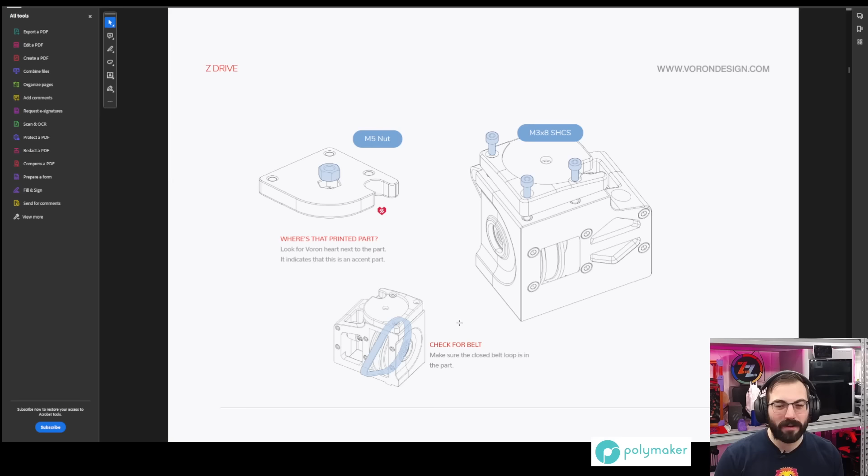You don't want to ever use an inductive probe, but any stock probing setup where you use the nozzle to press the probe button, like a stock 2.4 Trident, it's kind of like having to replace or recalibrate your end stop every time you change out your PEI sheet with a different one.

Which, if you're getting one of the fancy ones, your build plate can look like this, or this. What the heck, what is this? This is an H1H sheet, and I actually have one for this build. I have a standard PEI sheet, so it's going to look like this. This is a 350 PEI sheet, it has that kind of fun texture on it, so I'll be using this on this printer. The other side is just texture PEI. I'll have links to these build sheets in the video description if you want to take a look and buy one for yourself.

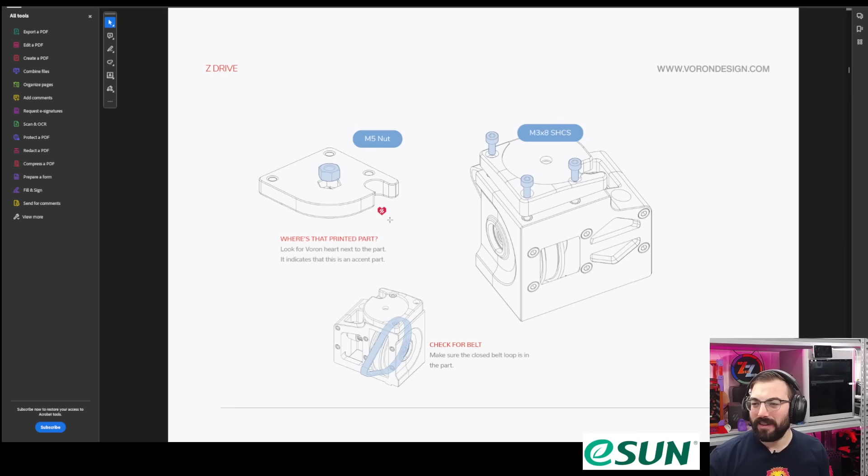Next we have the feet kind of accent parts. These ones are an accent color, so in my case it's gray. Gray is my accent color. We need M3x8 screws to assemble it, and then M5 nuts. So let's find those and get those assembled, again all at once, because that makes it easy.

Let's see, we need our M5 hex nuts, and we should have a metric load of M3x8s. Take these and then dump them right into your organizer, because that's probably one of the most used screws in this printer build.

I have 273 with spares, there should be a spare parts bag. 273, oh my god, that's a lot of screws. I don't think I can actually dump all of them out either, I can dump out maybe half of them, so I'm just going to fold this back and put it back. Yeah, weird quantity, yeah?

So we're going to grab just 4 of these M5 hex nuts. This is not a quick build.

It really isn't, it truly takes an experienced builder probably around 20 hours to build. If you're new at building a Voron, I would dedicate a full 40 hours to this thing, at least, to get it built and then calibrated and printing, etc. At least 40 hours.

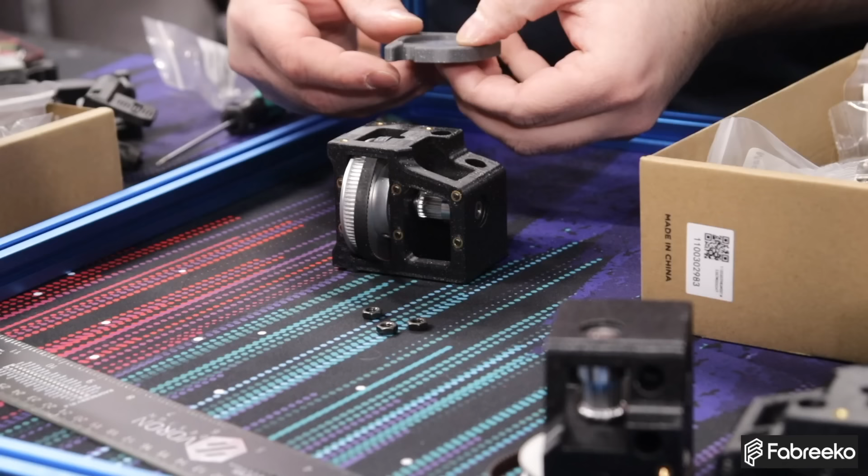This little nut goes on the bottom side of here, and we'll have to be careful because this will just fall out. We're going to be very careful, and we need to figure out which part goes where. So this is not the correct one.

Let's see, you'll have to line it up like this. I'll just dump it out for a second. So you want to line it up so it looks like that. You have one side where the holes are closer together, and that'll kind of match up right here, and then you'll have that hole cut out. If you do it on the other one, then that won't line up properly, because you'll have those two on the right side, but then your other side is wrong.

So take a few seconds and figure out which one it is, and then get your screw in place, and then be very careful. I like to just slide it over and then line it up. The screw shouldn't fall out, it shouldn't fall out, I don't think, by the design of it.

Let's see, it should just be held on by a part of the print. How does this work? There's even a little cutout here for it. I think if you come in from that side, that works better. So get it lined up. Don't lose that nut, make sure the nut doesn't fall out.

A non-stop stream until it's built. Oof, that would be a lot. That's a lot.

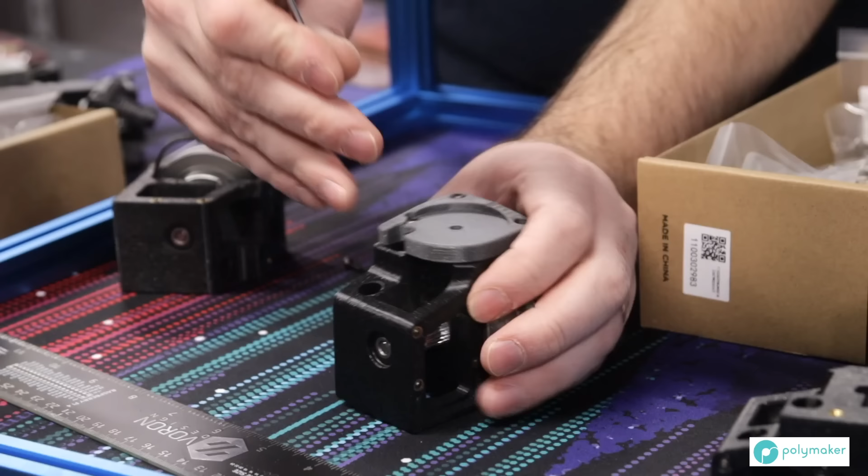So this part actually does two things. One, it acts as a bit of an accent piece so you can screw your feet in. It also allows you to put a nut in to screw your feet, and it also holds these two pieces together. On this long side right here, it's actually going to act as another way of holding the pieces together, so there's a seam down the middle of that. If I hold it correctly, you can see that seam, so make sure everything is lined up so that's not going to split apart.

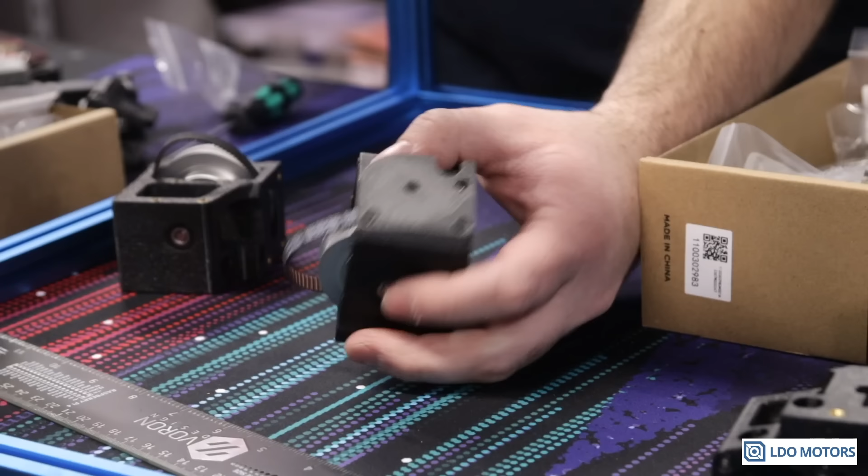Helps if I put the screw in. If you're screwing it too many times and it's not working, make sure you actually have a screw in there, that's your problem. Just get this nice and snug, don't go too crazy, looks like that. And you should have a nut in here that is still in and hasn't fallen out. Triple check that, otherwise you'll have issues.

Make sure that belt kind of stays on the pulley too. Repeat this process three or four times.

Hybrid says, as I watch your build streams, I'm getting confidence that I can build one of these. Of course, at 20 hours, it'll probably take you at least 20 days to build, and that's fine. Honestly, that's perfectly fine. Take your time when you build a Voron. It's your printer, any custom printer, it's yours. Make it yours by spending enough time to make sure everything is set up right. Have a build guide up or a build series. I'm sure at least one person has a start to finish build series where they build a stock one of these.

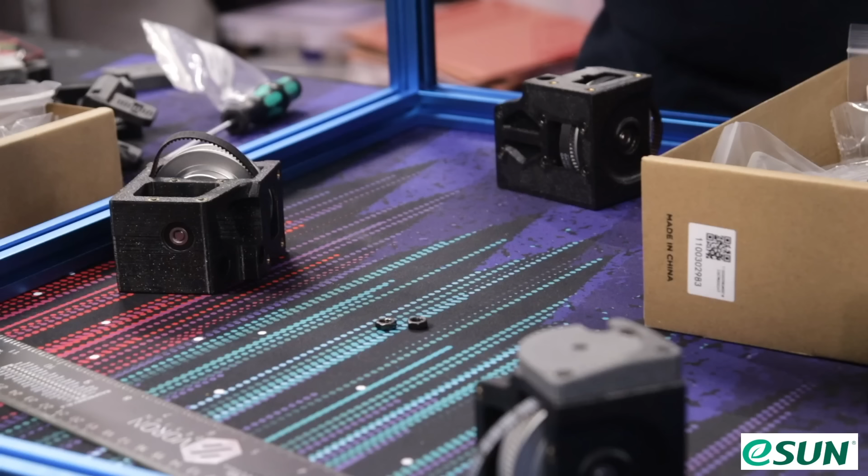If you have any questions, pause the video, stop, go to the Voron Discord. If you're building a Voron, utilize the Voron Discord. There are channels for each one of these printers. Ask your question, it might sound dumb. I've asked dumb questions before. Sometimes just asking the question, you get the answer. So utilize your resources. You can ask me for help too. I can't spend as much time as some of these people can, but I am a resource, I've built a lot of these. Ask your questions. If you want to join my Patreon to get even greater support, you can do that too. More than happy to help you out.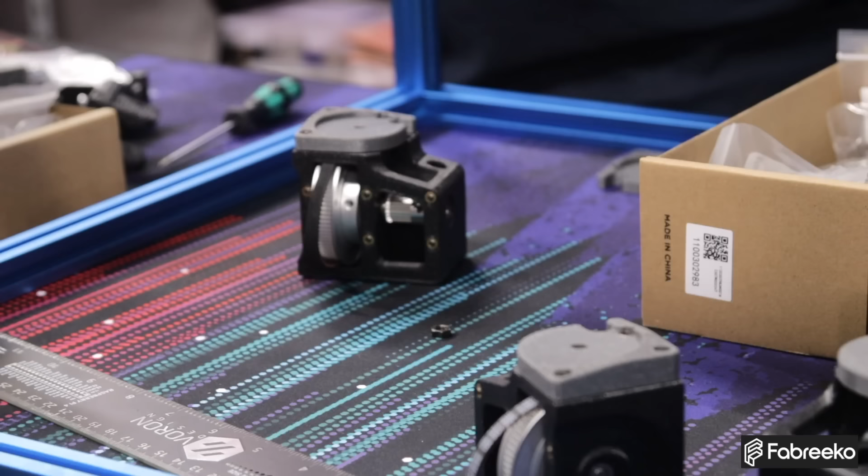So I'm just going to use a Dragon Burner right here, and I've showed this off previously. I'm going to use the adapter for Voron. This is MGN12, so a typical 2.4 mount. So I'll be able to mount one of my Dragon Burner tool heads, get that assembled, test it, make sure that everything works good, and then essentially remove the tool head and install the Tapchanger mechanism.

Or Stealthchanger, whatever I use, which in this case is this right here. So I'll be installing this. This mounts to the printer. Then this is the little receiving carriage that goes up and down. So I'll be able to, I think it's backwards. There we go, be able to go up and out. That's the docking motion. Pretty cool. And then Dragon Burner will mount perfectly right to here, I think. Yeah, maybe. It looks like I didn't account for this little nub right here.

Oh, there's a spacer, right. Okay, I see it now. So there's a little spacer that goes in, which I actually printed. It's this right here. Ah smart, smart, I see what you did there. So a little spacer, and then that attaches to here. The spacer is there so you can print this flat and then put this on after. I might recommend some way of indexing it so it's easier to install, but we can figure that out later. I have a couple of ideas just looking at it.

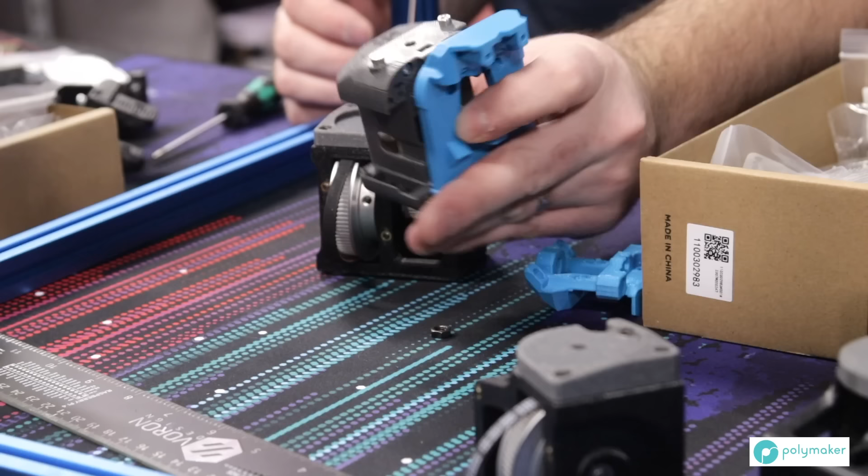So this is our tool head style mounted onto that. So it should be a pretty, not seamless transition, but a very quick transition over to the other mechanism.

Is it easy to remove cable chains? Yeah, it is. But with the cable chains, you have all the wiring that goes with it. So you might as well just go straight to the final wiring, so you don't have to redo that.

Probably the biggest pain. Oh, I think I lost my nut here. Yeah, so I think I lost my nut, let me fix that. I might recommend installing the feet, or at least the screw for the feet onto here, just to make sure that nut doesn't fall out. Yeah, in my situation, the nut came loose and is sitting on here. Make sure that nut is in place and hasn't fallen out, otherwise you will have a bad day, you'll have to take apart stuff.

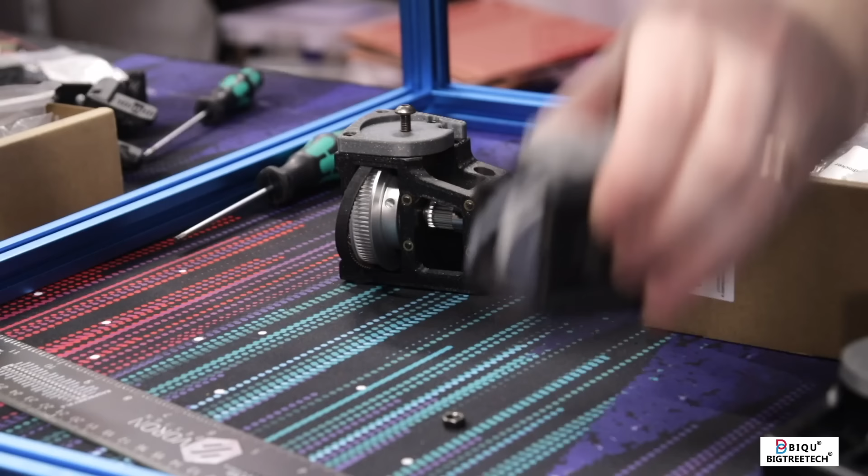It's an M5 by 16, so if you want, you can find your M5 by 16. I think that's what you use to install the frame, and then you can just screw it in like so. That way you can't lose that screw. It should stay in there if it's in there, but just as a sanity check, I'm gonna put in all of these and make sure that screw is in there. Now that there's a screw in there, it's not gonna come out, so I recommend doing that. I don't know why you can't just install the feet now - guess you could, but I'm just gonna do this for now.

There's many ways of building these printers. I'm just following the guide. I've already missed a couple steps. All right, and lastly, put this last one on. Getting pretty good at this.

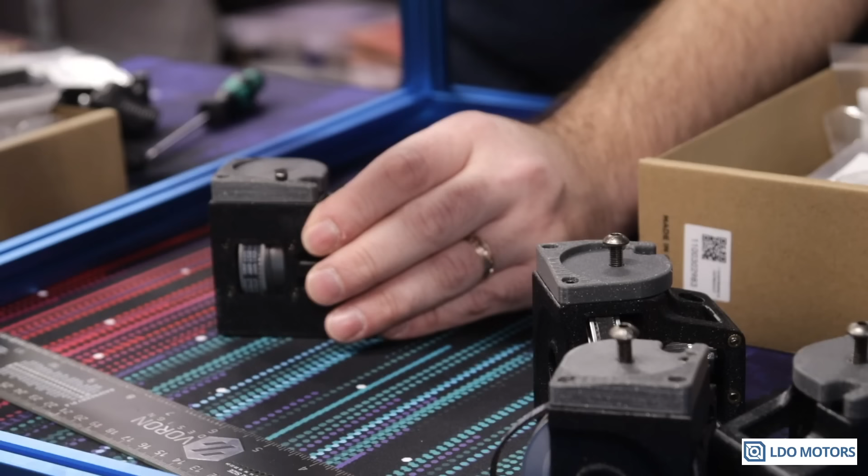So a question on these larger Vorons - what is the fastest you can print and still keep great quality? Well, the standard profiles for a Voron are designed for the bigger printers in mind. Whatever those profiles are set to, that's kind of what you can expect as the fastest speeds. So what you can do is open up your slicer, like Orca Slicer, and select whatever printer you are thinking about - this would be a Voron 2.4 350. You can import that and look at the stock speeds, and you'll notice that they're not crazy fast. That's on purpose - Vorons are not supposed to be fast printers. They're just overbuilt, and because they're overbuilt, you can go fast on them. Because they're built so well, you can also print fast.

What material do you use to print these parts? So all Vorons are printed in ABS or ASA. In fact, the parts are pre-scaled, so they're scaled up to account for the shrinkage on ABS. Technically, you can use PLA for printer parts, you can also use PETG, but the issue with PLA is it will eventually melt if you have your printer in an enclosure. Vorons are designed to be enclosed, so the chamber temp is at the same temperature as where the parts will start to melt. That means your screws will start to get loose, and it'll all kind of just deteriorate. PETG, I believe, either cracks under heat or creeps, so PETG is a pretty poor material for these types of printer parts. ABS is ideal because it has that higher temperature resistance, is very easy to print, and has a little bit of give to it, so it's not completely stiff - it allows for some amount of flexibility. Hopefully that's helpful.

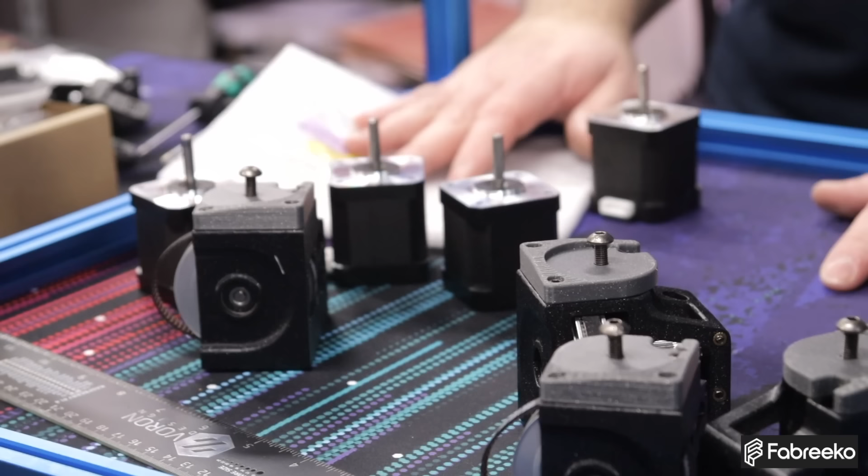You don't have a lot of room to put assembled printers? You don't know what you'll do to build one. Oh hey, well you see what I'm doing right here, right? I'm working kind of in this space. It's really not bad - I could do the whole thing just on this amount of space, essentially the amount of space that the printer is going to sit on, if you absolutely had to. Just take your time and make sure you keep everything organized.

Micron 180 is a pretty nice build, but if you don't have a big printer, it might be worth spending a little bit more. I really like the 350 size 2.4 just because it scales up very well. And even if you don't need 350, you'll get the possibility of using a 350 if you have to print something big. So this is the printer I'd say to go big with. For a Trident, I would strongly recommend 300 as a maximum. LDO has a very special kit that has a 300 cubed build volume instead of the stock 250Z - it's almost 300 on the Z.

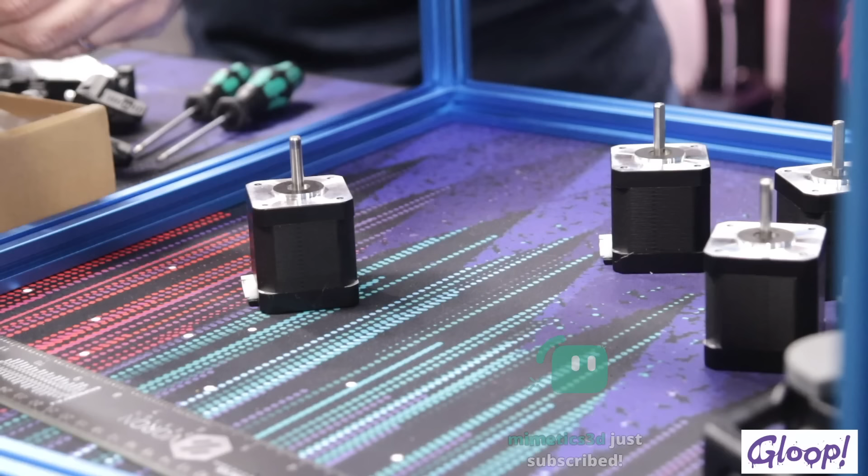Gotta figure out. So we need 16 tooth pulleys. Okay, so that's these right here.

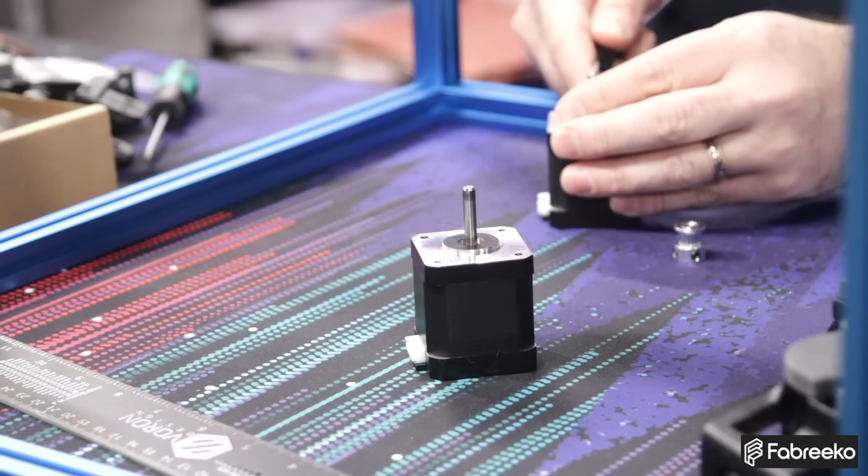For example, I do recommend Bambu Lab printers. I have an X1 Carbon, and I know many people with varying Bambus, whether it's the P1S, P1P, or the new A1 printers, and they're pretty damn good. Like I said earlier, I printed a lot of these Voron parts on my Bambu. So if you don't have a printer yet and you really want to build a Voron, buy a Bambu P1S, which is an enclosed printer. You'll be able to easily print ABS on it. Buy yourself a flexible PEI if it doesn't come with one, print all your Voron parts on there, and then build a Trident or 2.4 or whatever. It's a really good tool to have. Plus, if you get it with an AMS, you can do multi-color printing. It's just a real good printer to have. So if you're interested in buying a Bambu, I do have an affiliate link, and I do recommend them.

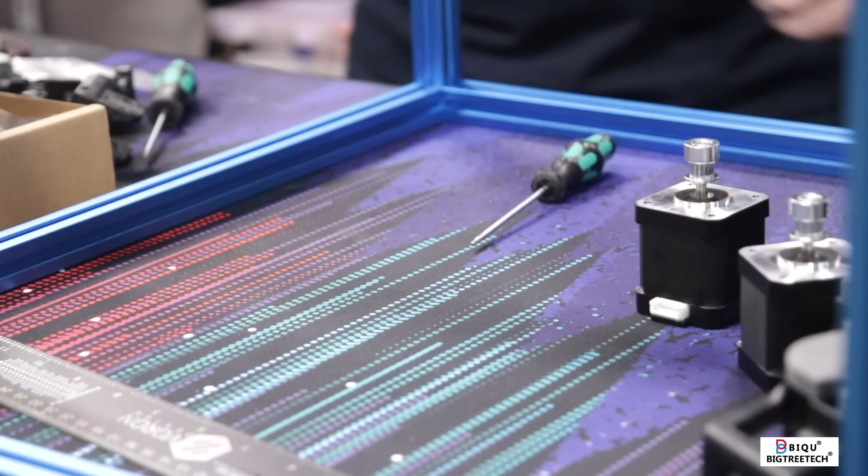Sometimes if you feel like there's no content, or like there's a lacking amount of content, start making the content yourself.

Motors, yay. Now I didn't fine-tune the pulley position - we're gonna do that after it's installed, because honestly, using that little jig mechanism to align it, there's some variance in it anyway. So we're just gonna roughly install these, get them centered, and then tighten them up.

Welcome in, Thessian - I believe that's how you pronounce your name. We have built 4 of these. 4 of these, that's it.

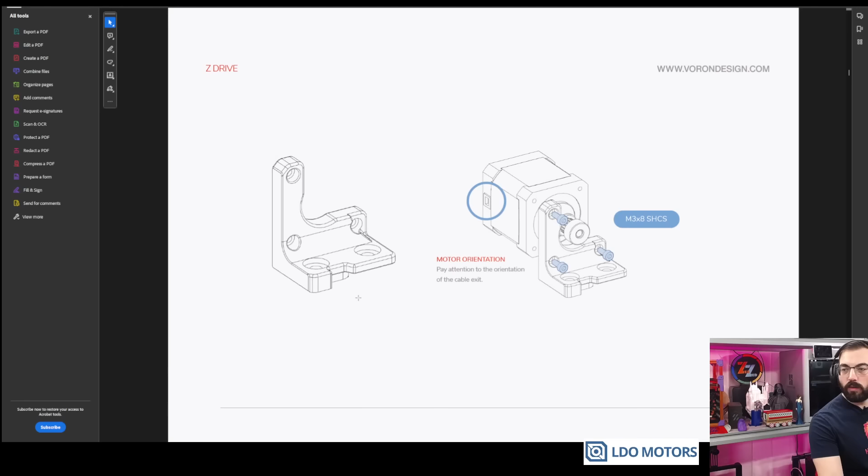Now we are about to install the motor brackets. We have 4 of those, here. Before the stream, I went through and separated all the parts by where they go - I've built enough Vorons where I kind of just know what parts are which. So this one, we have a motor orientation: the flat side of this part will want the cable sticking on the other side. So when we install it, the cable will be away from the gear reduction assembly.

Love your Bambu, but your Voron is where it's at. You like to build, but being able to send a print and not babysit it is really nice. That's why I use my Bambu - on the Trident I have to soak it, preheat it, and if I want to print ABS I've got to load filament manually. But on the Bambu I can just send a print job to it, and then there you go, it's done. It just prints and does everything. It's a very lazy printer, and sometimes that's exactly what you want.

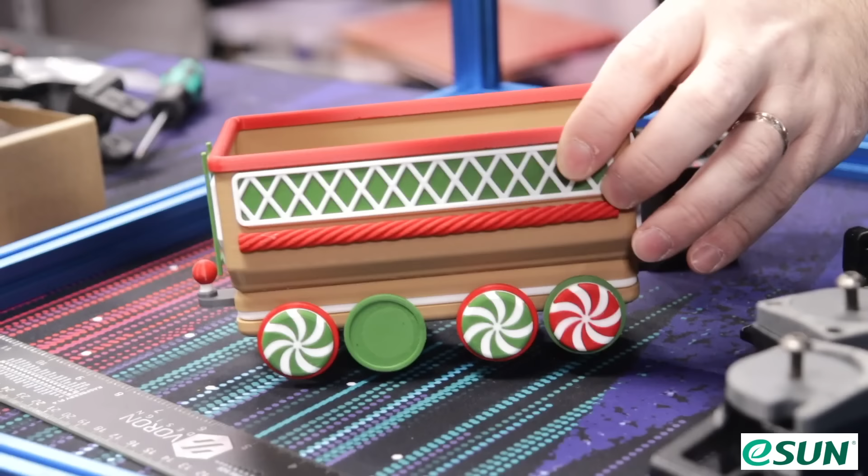The Bambu has allowed me to do way more projects than I would have done otherwise. Like even this little train - one of the pieces fell off, I didn't actually finish this project. I started it, there's 1,000 pieces for this, and yeah, I never finished it. But projects like this, where there's a lot of parts, having a Bambu makes it easy to do all the multicolor bits, etc. So I've done way more because I own a Bambu, even if I've built 500 Vorons. Just my take on it.

I'm using 3x8s for these. So the flat side right here - there's 2 flat sides technically, but one side that's not really flat, then a little side that's flat. This little flat side is going to align with your motor cable. So get that nice and tight.

In fact, I like the Bambu so much that I'm looking at getting another one - one that I can kind of dedicate to multicolor prints. There's a lot of plates set up for a Bambu, and it's really convenient to just send a print to it, pre-sliced, pre-painted, etc. But with the Toolchanger, I don't know, I feel like I might go back on that and might only need one. But having 2 is useful if you're doing a lot of projects. So maybe.

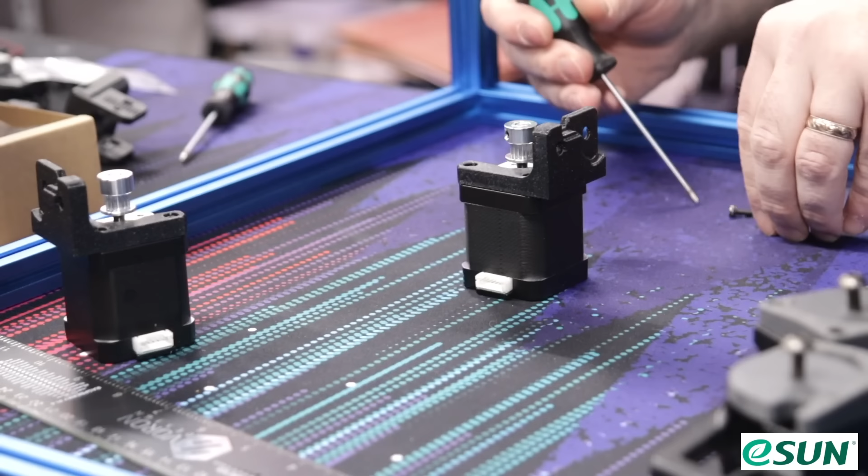We haven't even put the linear rails into the frame. I'll do that off stream, get them all aligned correctly. I'm not going to show every single step to build a 2.4 on this stream, so don't expect it. I've mentioned that a couple times. If you're using this as a build guide, maybe you'll get some tips and tricks for building yours, but if you want to actually reference a proper build guide, I would look to someone like Steve Builds or Modbot, who do almost nothing off stream and spend about 5 months building a printer. But at the end of it, you get a nice build series that's start to finish. So there you go.

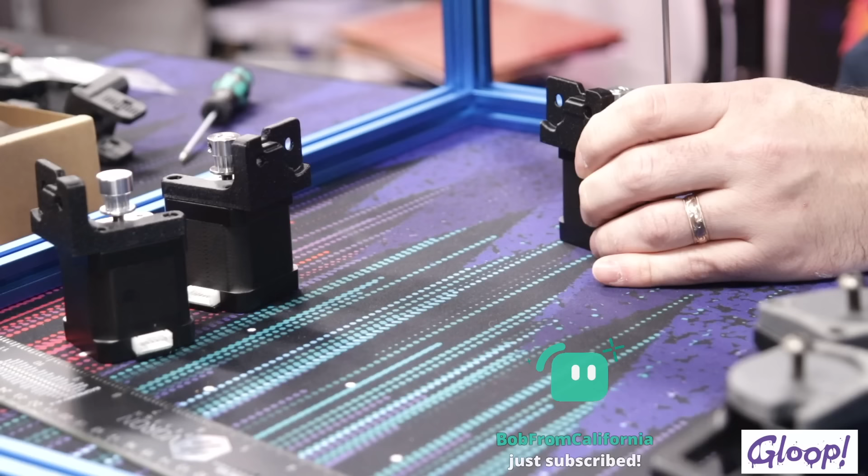I don't think I'm actually going to install these in the frame today because I still got to get the bottom cover installed. I don't know if I can have these installed for that. So we're just going to finish getting all of these set up as best as possible, which I think this is the last step.